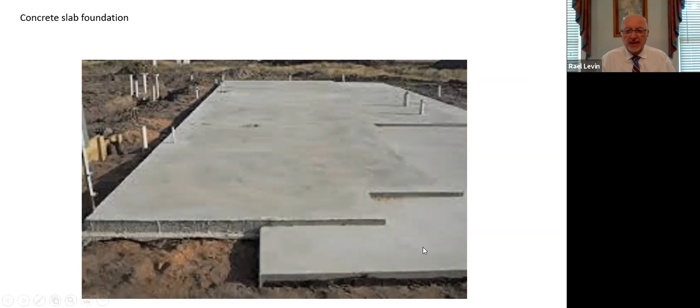Next up, which was most common from about the late 50s or 60s on through even to present day, we deal with the masonry block, and the masonry block is a process that is great. It's a super good way to put in a foundation, but with all types of foundations, we need to have the correct installation of the items around it.

It's an oil-based product, and it's rolled on or sprayed on to the foundation on the exterior when we are in this location and this time of the actual building. What's also a good idea is to perhaps have a drainage system installed here with some gravel and some piping.

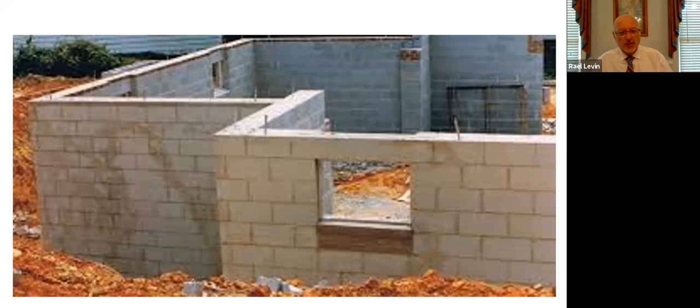But just to jump back to this for a second, what will happen here is when the structure is built, one of the least expensive things that folks can do when they do build a home is to extend the downspouts from the gutters at least 6 feet away from the home. And there's a reason for that: as the water comes off the roof, goes down the downspouts, and just dumps out right next to the foundation, we do start to see some settlement in the corners, because the water is going down deep and washing away some of the soil and some of the foundation cement that's in the bottom there.

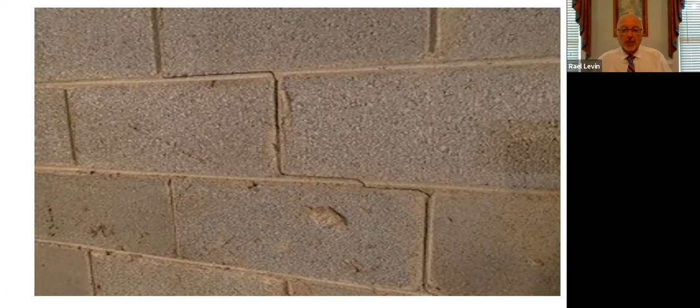And so we start to see what we call a stair-step crack. And we can sometimes pick that up on the outside of the home, where we would see it in the brickwork. And that would just be more of a cosmetic thing, perhaps, until we actually got into the basement or into the crawl space, where we would see settling going on. And it could be a simple remedy where perhaps we could extend those downspouts away to stop that water from constantly going to that particular location and allowing the settlement to happen.

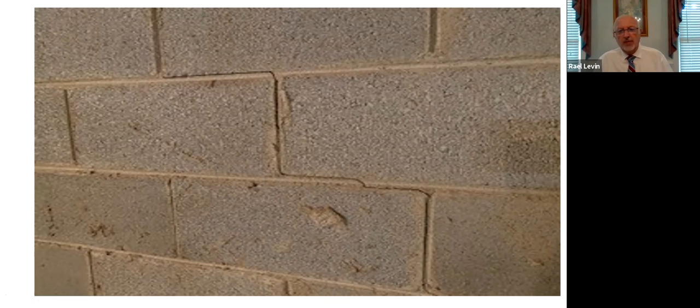But what happens is, as it gets worse, and we call that movement and that settling, when it's all along the wall, the pressure that's put on that wall is called hydrostatic pressure. The wall is actually moving now, as you can see here. Look at the displacement that we see right here on the cement block. If you look over here on the right side, this is the moisture that's showing up at this corner, and that is a typical result of water coming out the downspout at the corner of the home and spilling down into the dirt.

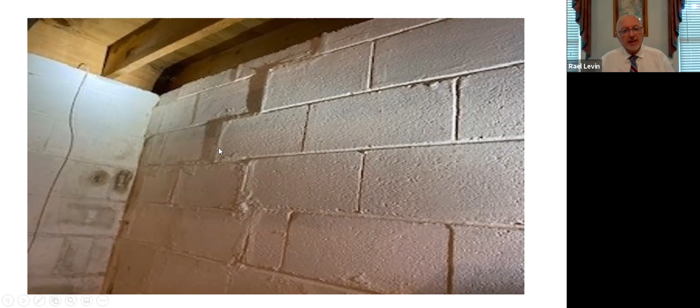And we could be 8 or 10 feet below grade here, and we'd be seeing all this moisture. The fact is that these masonry blocks are porous, but they also have 2 holes in the top, and so any moisture that comes in near the top basically drains down to the bottom. So what we're seeing here is all along this wall we are having some movement, and this would need to be addressed pretty soon.

If you're showing a home and you see something like this, not necessarily a crawl space, because I only met one real estate agent, she was really tiny, and she insisted on getting into the crawl spaces with me. But most real estate agents are not going to go crawling into a crawl space. So you would not see this until we get to the inspection process.

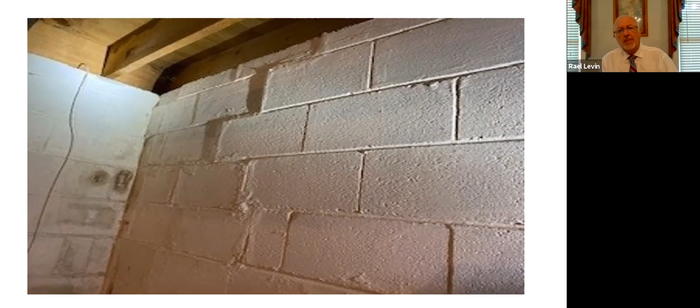However, if on the exterior of the home you're looking at the brickwork and you do see some significant settling and gaps, both horizontal and stair step, then when you call for your inspection, give us a chat, and perhaps you could send us some pictures. And maybe we would even recommend that before we do an inspection, you get a structural engineer in there to have a look at this, simply because the structural engineer will give a scope of work, which will give the contractor an idea of what has to be done to remedy this particular type of situation. So you can see here another picture.

Now we're getting down the wall a little further, but you can see it's pretty significant, the movement in that masonry block. I've actually seen some where they've tilted in so far that somebody had tried to remedy it by putting in steel girders on the interior of the wall, but there was literally so much water coming in through there that it was causing the actual foundation to fail, and that was not a good idea to continue on to purchase.

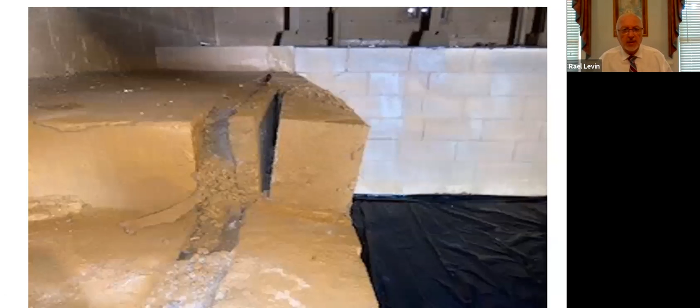All right, so again, we're looking at the inside of a foundation shed. If you look on the right side, we can see where we have our masonry block. So what's happened in this particular case is an area in this foundation or footing area in the space where you can see there's a plastic barrier here, a vapor barrier that's in, but in actual fact, they've constructed and poured concrete on the inside of the actual original foundation, again, in an effort to stop water intrusion into the basement. And again, the hydrostatic pressure is causing this retaining wall to fail.

So even though the concrete is 4 to 6 inches thick that they poured here, the moisture that's traveling through the dirt is causing this wall to collapse. And you can see in the back here, you've got a vertical crack. So that's a tremendous amount of water pressure coming in on that back wall. So the way that they handled that situation was they put in a sump pump. And that sump pump is basically an ejector system with a float. You see the wire right here.

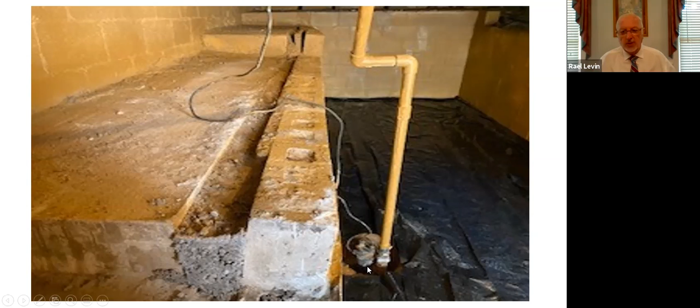It has a float, so once the water actually fills up this little dugout area right here, the float causes the motor to turn on and eject whatever water might be in this little pit right here that's been dug. I suppose that's the best they could do, but it really should have been addressed from the exterior. Sometimes they put a drainage system on the outside to try to remedy this, but perhaps that wasn't totally available. So that's what we're dealing with in this particular instance.

There are supports that are put in. So, you know, when we do have moisture and we have water perhaps traveling through a basement area, being that the structure, again, is set to transfer the load to the foundation, we have what we call masonry block piers. Piers and supports can be found in many, many homes, and specifically older ones.

Because once moisture does actually enter into a closed-in area like a basement or a crawl space, it's a warm, dark space with moisture, a perfect opportunity for mold growth. Moisture and wood is also a wonderful opportunity for termites to have their tunnels and to attack the structure. So that's what we'd be looking for.

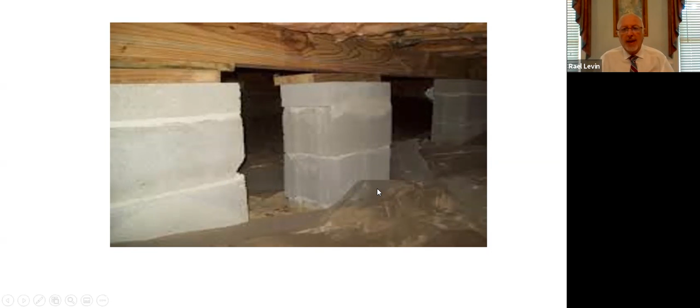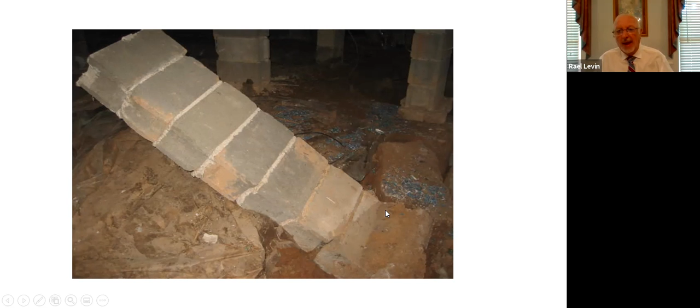In this case, we're just showing some support here on the main beam running through the bottom of the home. And they've put in some masonry supports because there's been some sagging taking place and they wanted to level this area out. Here we can see a situation where the pier actually has failed. If you look down here, you can see there's water down here, there's gravel. They've tried several different methods of stopping the water from coming into the basement area, and it's been unsuccessful. So water has been traveling through here for some time, and eventually the soil gave way and the pier actually failed.

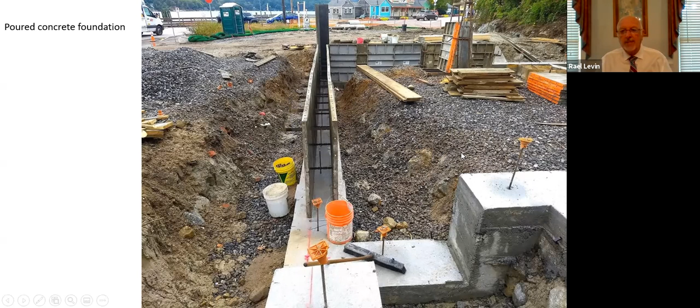You can see on the side here, they're already starting to put in some gravel and perhaps a drainage system there. But that rebar that's installed here is to hold the whole structure together. So once the forms are removed, it'll just be a poured concrete slab all the way through. And so this is still going to be a crawl space area. They've got the gravel down here, and I'll show you what transpires after that.

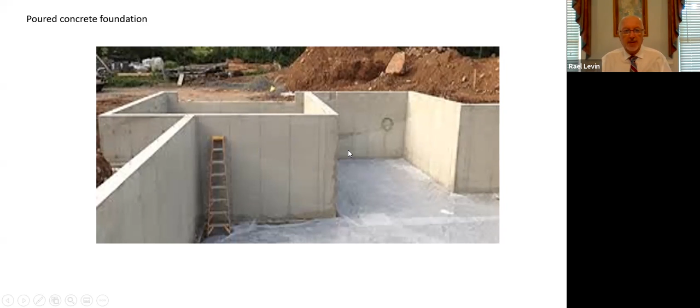Alrighty, so now we're looking at a totally poured concrete foundation. This area right here would probably be where the garage would be installed. And the rest of it, you can see it's pretty high, maybe 8 feet, 10 feet, which would be great for a finished basement at some point in the construction process.

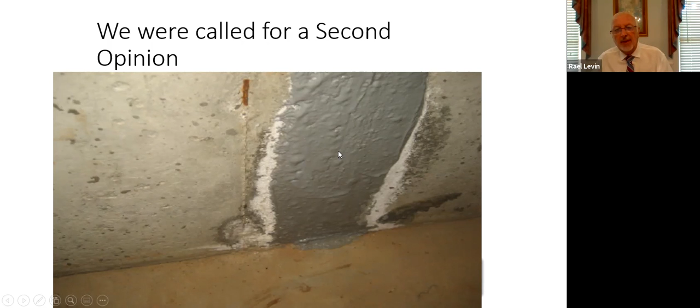So there's several different ways to patch the cracks. Obviously, the best way to do it, if you could, would be to excavate on the exterior. But sometimes when these cracks show up, it's really way further along the line, and we've got gardens and things being placed, and we don't want to dig all that up. So you do it from the inside, and you could do it with an epoxy injection.

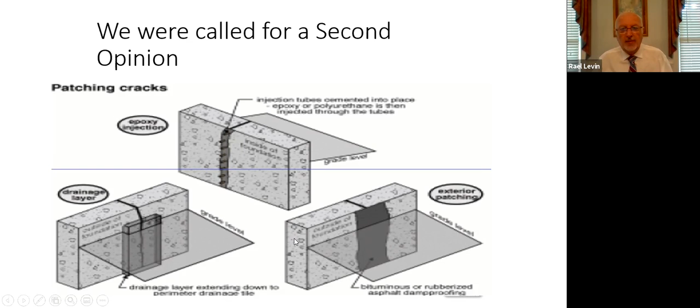You can see here where they drill the holes and they put the plugs in there, and they put the chemical into there, and then it hardens up and stops the water from entering there any further. So we just see a couple of different ways that it can be done right there.

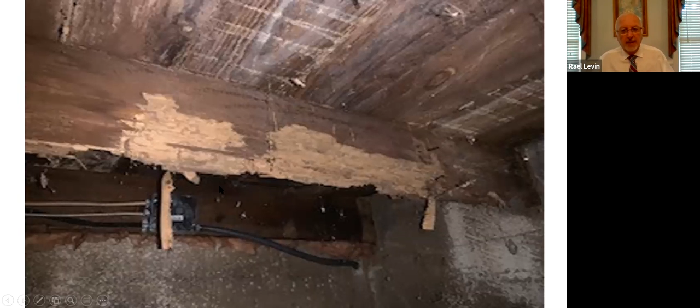So when we do deal with the moisture, as we mentioned, termites are in there. They love to get in and eat up on the structure that we're looking at right here. There's a couple of pictures of damage that we have seen right there. So with the fact that we have wood rot or we have termite damage, we have perhaps the beams that settle. You can see here where these folks are actually measuring.

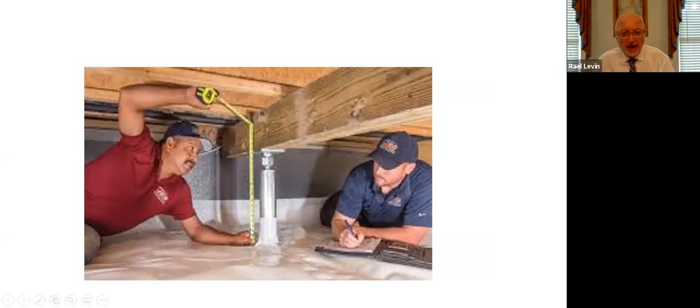They have what we call a temporary support that's in there, and now he's measuring for a permanent support that would be installed here. This is just a regular jack that can be adjusted up or down. And here we're going with a permanent support. They would have a proper little footing in here, a little foundation. And you can see there are plenty of them here.

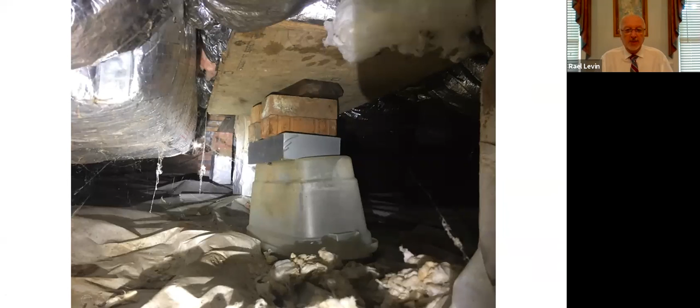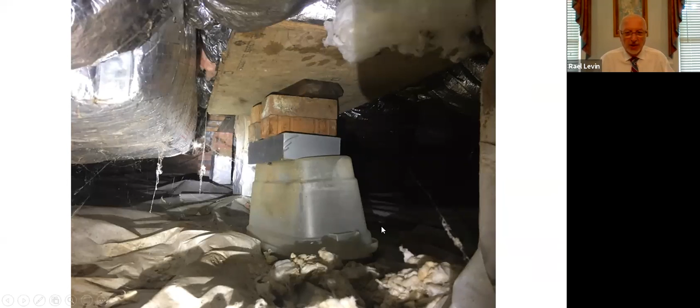This is one of my favorites, a great advertisement for Rubbermaid. This was a home that had been renovated, and a shower pan had deteriorated and collapsed. And so this is the way they supported what was underneath there. I thought it was a good chuckle and a great advertisement for Rubbermaid. So we find all kinds of weird stuff down there.

It's amazing how folks think that inspectors would probably not go into a crawl space. At HomePro, we do. We have a goal of being able to touch all four corners of that crawl space and get to all the areas that are under bathrooms and kitchens where there is likely to be more chance of rot and problems. But we do want to get to see the total foundation. We want to be able to get all around there. And that's what our goal is every day that we do get into them.

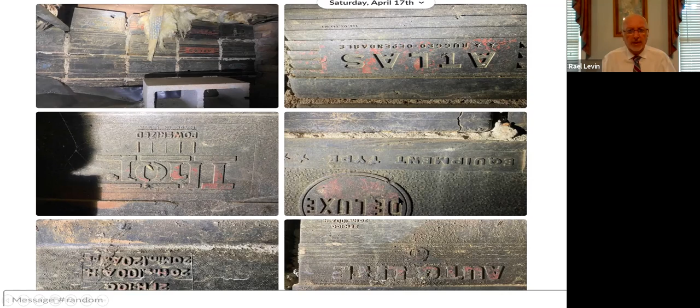Most of the time when you have a county or city inspector, they're not going to go into a crawl space. So it's really important if you have a new build to have a pre-drywall inspection, or have somebody like HomePro go in there and have a look at the structure underneath before it's covered up. The county inspectors will look at a structure when it's open before the subfloor system goes down, so they can see everything from above. They don't do crawl spaces.

In the case where we would have foam insulation installed into a subfloor area or even into an attic area between the rafters, you cannot see the actual structure in the attic. So we cannot see if there's anything leaking there until a large stain shows up. It takes several months of steady rain into an area that was leaking to see the stain in the attic.

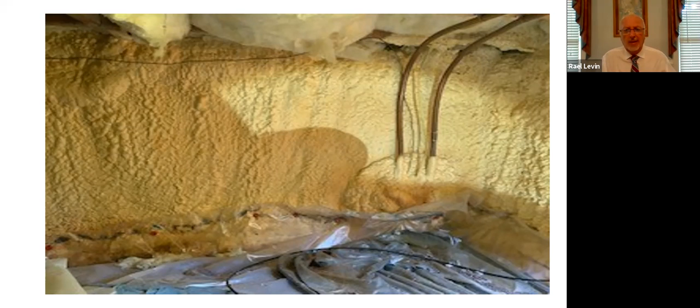And in the basement area or the crawl space, if we're looking at trying to identify items in the plumbing or the heating and cooling or even the structure, and the foam has been installed, we can't see that either. So it is really a limitation in what we can and cannot see.

So there we have, you know, kind of a look. We see our engineered floor joist here, and you can see the structure of the foundation. And this is the way the actual weight is distributed over to the foundation section.